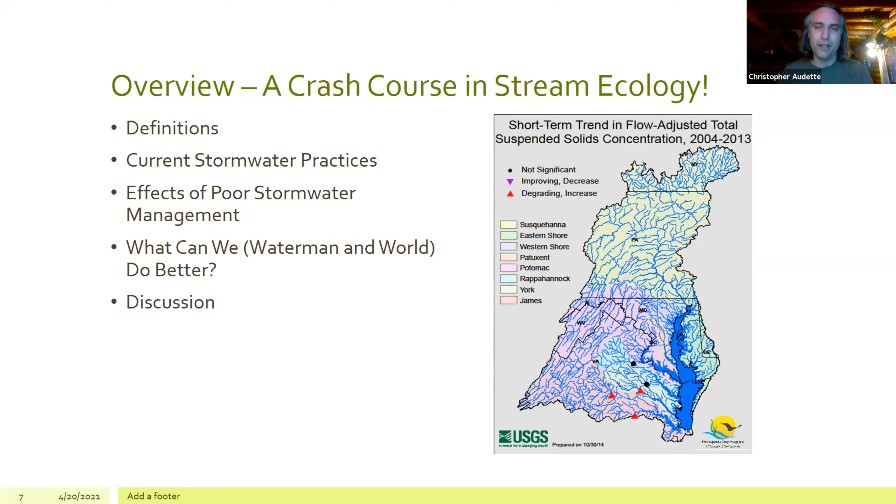All right. Let's mull through some definitions to make sure we're all on the same page. So what is stormwater? Basically just water running or pooled from a storm event.

Impounded means water that's held somewhere or dammed. Infiltration is just how water enters the ground. Erosion is the process where soil is removed by flowing water, for our purposes. Yes, there are other types of erosion.

I'll talk about particulate, generally small solid fragments. They may be dissolved, they might be suspended in the water. They could be made of minerals or they could be made of organic matter. And from there, we break it down into particulate organic matter and dissolved organic matter and some other categories as well.

Sedimentation is the process where particulate settles and it might cover habitat, it might fill crevices. It's basically just the deposition of eroded material. Channelization, typically deepening, usually straightening of a channel or a riverbed.

Nutrient loading and eutrophication is the addition of compounds that promote plant growth, basically fertilization. And eutrophication is the limnology term for how that process happens in nature.

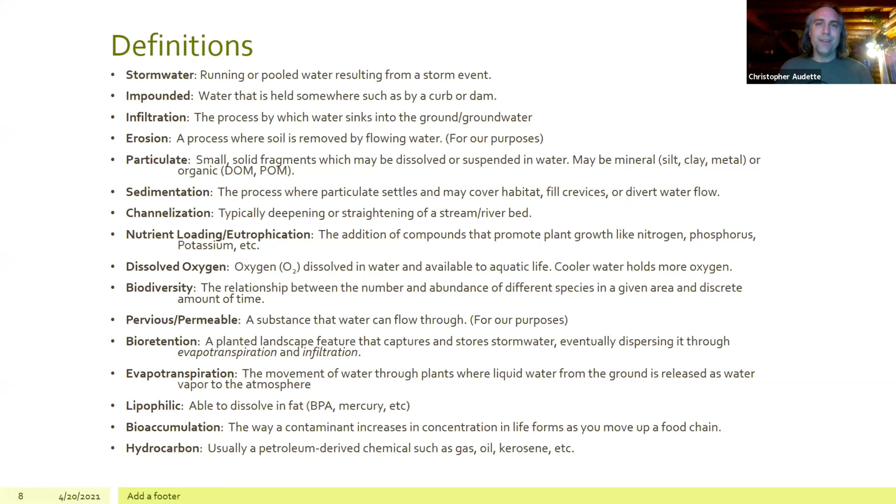As we go through things here, we need to take a break every now and then.

All right, so how is stormwater currently managed? In terms of our houses, we're talking about things like ditches and drains and gutters. We're looking at basically taking water and moving it away from property to avoid damage.

So we have our drippy gutters, we have our overwhelmed ditches, and eventually we want to get it out of here. So it's going into a municipal ditch, it's going into a storm sewer, maybe it's going to a combined sewer. But basically we're handing off that problem.

And it might be a little bit of water, it might be a lot of water, it might be a little bit of sediment, it might be a lot. It depends on where it's coming from and the practices on that particular property.

Similar themes in terms of the current paradigm municipally, though we are moving in better directions in terms of implementing more realistic infrastructure, more robust infrastructure, and green infrastructure.

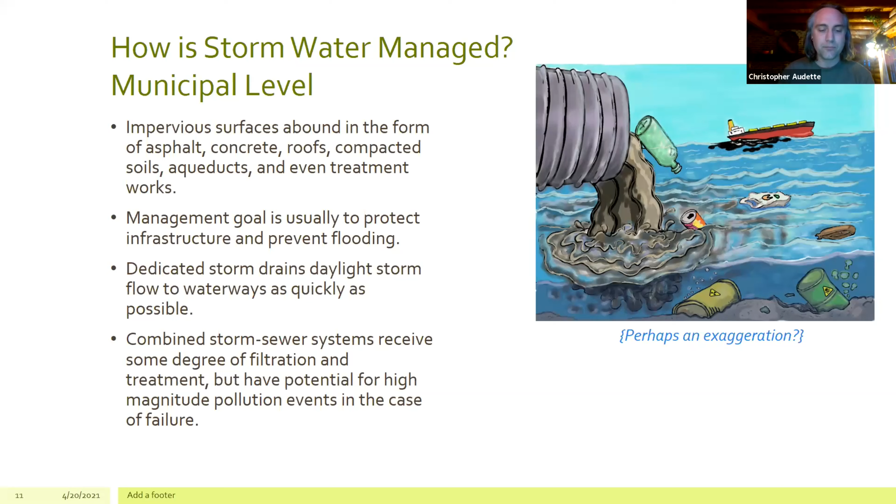But impervious surfaces abound. We have lots of asphalt. We have lots of roofs. We have lots of aging ditches.

Essentially ways just to move water and daylight it and get it to a waterway as fast as possible so that we're preserving life, we're preserving property, but we're also ending up with very fast moving water that has lots of stuff in it. And those are the two biggest problems. I also want to talk about turf.

You know, it isn't really what we think about when we're talking about impervious surfaces, but if you're looking at a wide swath of monocultural grass that has a lot of thatch under it, it's shedding more water than it's absorbing. That being said, there are ways to apply turf in sustainable ways.

What are the effects of poor stormwater management? So in general, poor stormwater management results in poor infiltration, which creates a rapid surface flow that results in a negative impact. All of the negative effects I'm going to talk about feed into one another and self-perpetuate, creating ecological problems and infrastructure problems too, and flooding and that kind of thing.

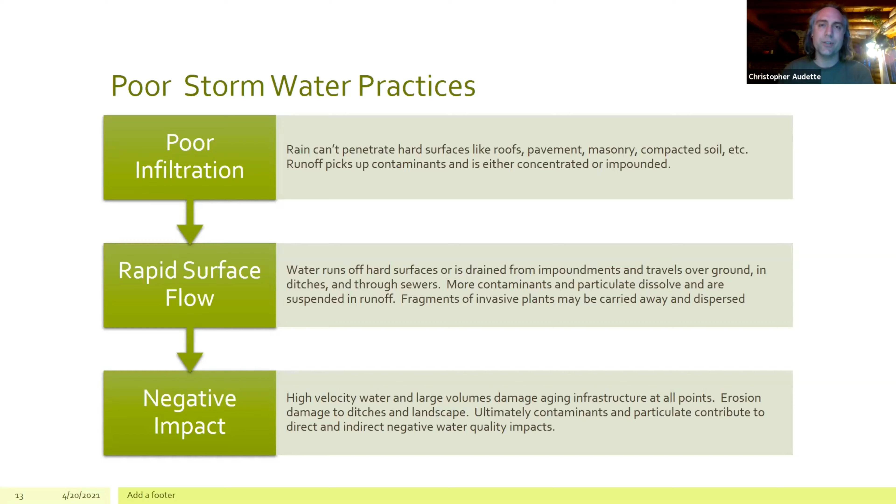So first I'm going to talk about salination and contaminants. We know that runoff from roadways and parking lots often has lots of bad stuff in it: road salt, hydrocarbons, metals, toxic compounds, pesticides, all of that. Residential and agriculture areas can have all of that, and also more fertilizer, more pesticide.

In the case of storm sewers and treatment works, even after treatment, antibiotics enter our waterways at documented levels. We've demonstrated that even at headwater streams in the Adirondacks, we can culture antibiotic-resistant bacteria. Now, the importation and accumulation of these compounds affects the number of species that can survive, either by killing them directly, degrading the habitat, or having their own demand for oxygen. And of course, in the case of things like metals and lipophilic toxins, there's definitely implications for bioaccumulation.

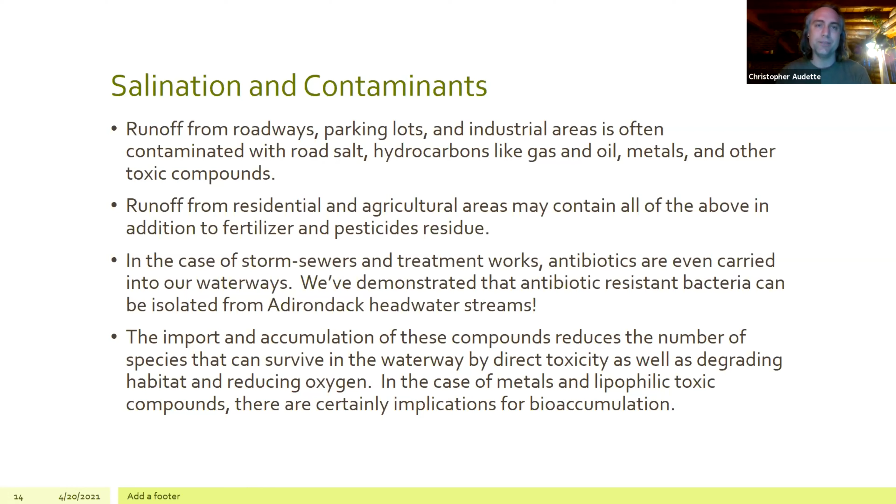You know, these are real world problems, and they stretch beyond just that's a polluted stream, or shucks, it's unfortunate that it flooded so much. There are long-term impacts that we see right in our backyard.

Another issue: while channelization isn't necessarily a result of poor stormwater management, it's integral to it. It initially was an effort towards stormwater management, usually looking to avoid flooding, but still more or less exporting a problem downstream. The unintended consequences of channelization are less diversity of habitat, generally an increase in temperature, scouring of the bottom, and it can make the effects of other processes even worse.

So we have the channelized state on the left versus a natural meandering stream that cycles through different flow patterns on the right.

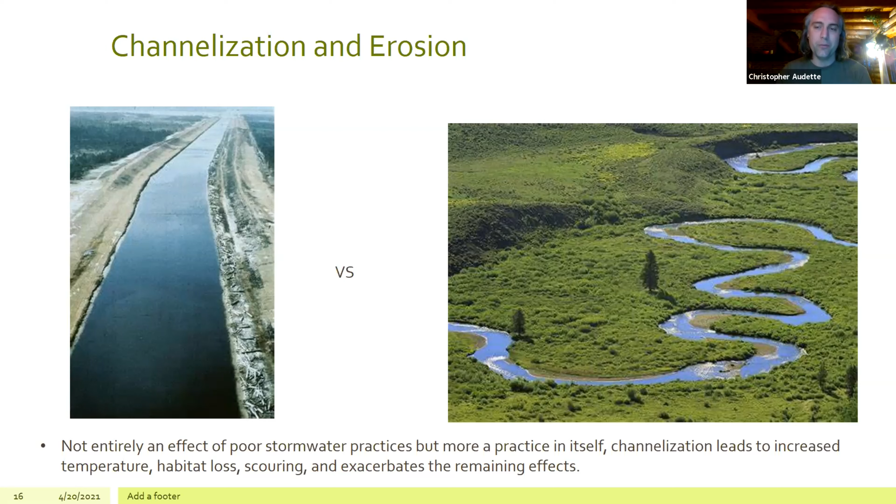The same process that created the Grand Canyon is scouring sand and silt and soil away from our watershed and transporting it to our rivers and waterways. Obviously, if it's powerful enough to dig out a canyon, it's powerful enough to have a substantial impact on our infrastructure.

So erosion directly contributes to sedimentation and nutrient loading in streams. Stormwater entering a waterway might be turbid, which is discolored with particulates. And these particulates may or may not carry fertilizer. They certainly have a fraction of organic matter and other things that decompose and take up oxygen, or they promote things like algae blooms, which we'll talk about their issues in a minute.

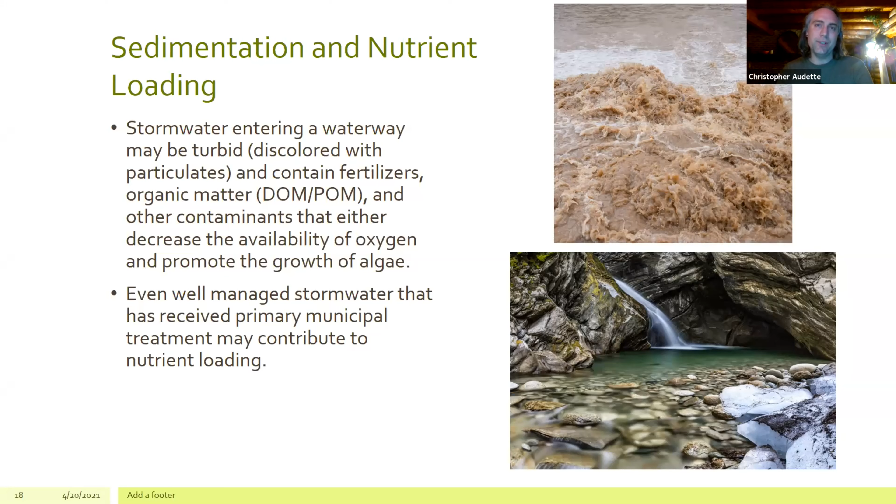And I wanted to note that even well-managed stormwater that's received primary treatment municipally can still contribute to nutrient loading. Even if we take the particulate out, even if we give it some kind of treatment, you can never take out all of the nitrogen and phosphorus.

So what this causes is in aquatic systems, naturally, over quite a lot of time, they go through a process called eutrophication. The systems tend to become more productive, but over a very long time. Stormwater pollution is a key factor in accelerating eutrophication.

This results in a boost in biomass from algae blooms, from the growth of something called periphyton, which is like algae that grows on the surface, and other aquatic vegetation. But this boom in growth isn't sustainable. It's not sustainable by the system. Eventually, it eats up all the nutrients and it dies back.

After it dies back, it decomposes. The process of decomposition, as I said, robs the system of oxygen, and we see a decrease in biodiversity, and it contributes to fish kills like I show in the pictures.

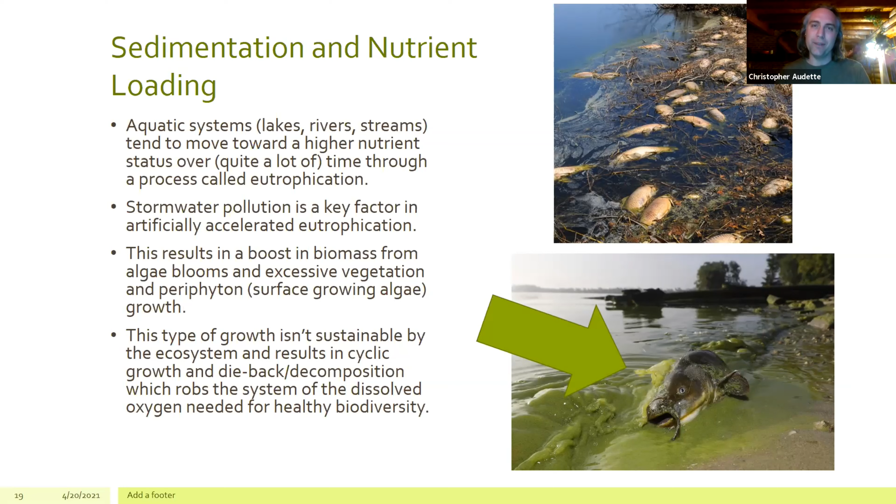And here, if you start seeing catfish and bullhead dying from anoxia, you've got a problem. They practically can crawl up on the bank and breathe themselves.

So algae blooms aren't the end of it in terms of sedimentation. There's also the issue of just the sheer material entering the stream bed. It can alter the topography of the stream bottom. It decreases the diversity. It homogenizes the bottom of the stream, which isn't compatible for diverse life.

In essence, this is habitat loss. We lose opportunity for fish breeding, either through inappropriate bottom and breeding habitat, or through silt being deposited on fish eggs after they're laid, essentially smothering them. It decreases dissolved oxygen, and as stream channels fill in, it's the opposite of channelization. There's implications for flooding, scouring of inappropriate areas, and then further erosion, and it becomes a cycle.

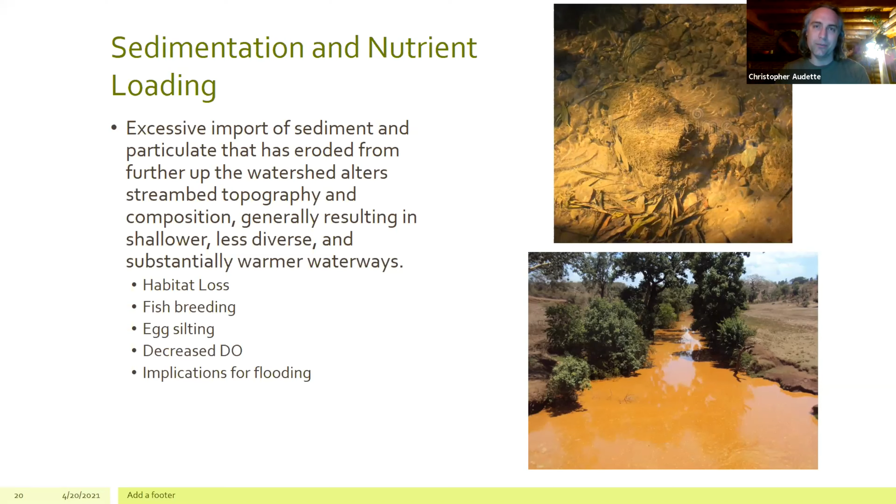Also, the darker the bottom and the shallower the stream, the warmer it is. That's one of the things that's led to the collapse of a lot of our cold water fisheries in Adirondack headwater streams, and that's why we're not seeing these heritage strains of brook trout anymore.

So this is a very scientific graph that I took data from Audette et al. yesterday morning. But I'm just trying to demonstrate, as storm flow enters the stream over the course of a few days, the water comes in at a high rate and that tapers off. What this does...

Is we also see, as the water is entering, we see an increase in dissolved and particulate organic matter. We can use this as an indicator of other contaminants entering as well. And then predictably, over time, as that material decomposes and starts demanding oxygen, we see dissolved oxygen fall off over time.

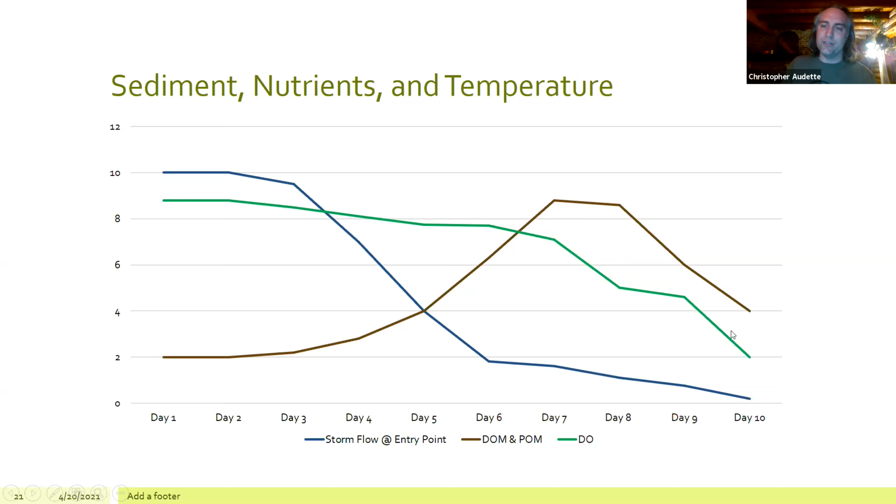So the cascade of all of these effects flow into one another, and I refer to it as a vicious cycle of stormwater pollution. The water immediately becomes contaminated or saltier. We also see the influx of nutrients and particulate organic matter causing algae blooms and sedimentation. We see lower oxygen, higher temperature. This results in fewer organisms and lower biodiversity, and then we cycle through it again. With lower biodiversity and less diverse habitat, the system's already more vulnerable to the next wave.

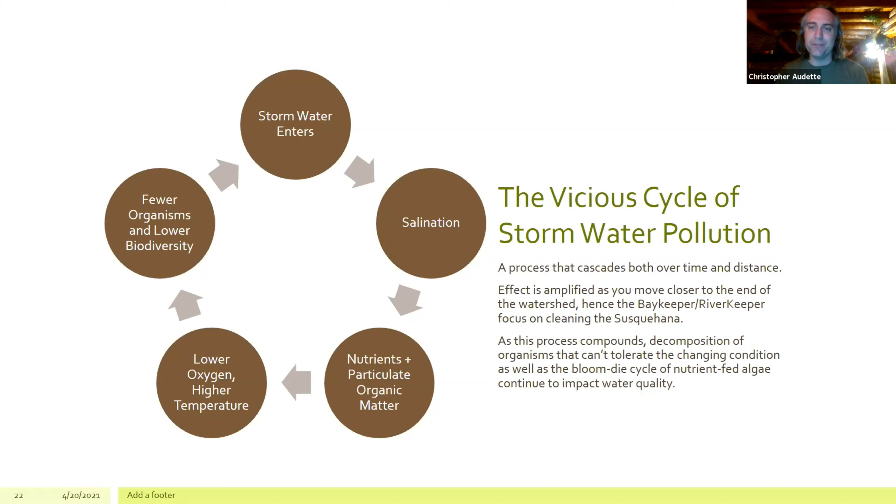So what can we do better? We know that there are distinct benefits to exporting water from our houses. Water in the basement and soggy infrastructure is never a good thing. We know that water needs to be taken away from places where people live in municipalities to protect business and life. But we also know that doing it as quickly and as ruthlessly as we can, and dumping it right into rivers, also has consequences.

So let's talk about sustainable stormwater management and Waterman's Green Innovation Grant Project.

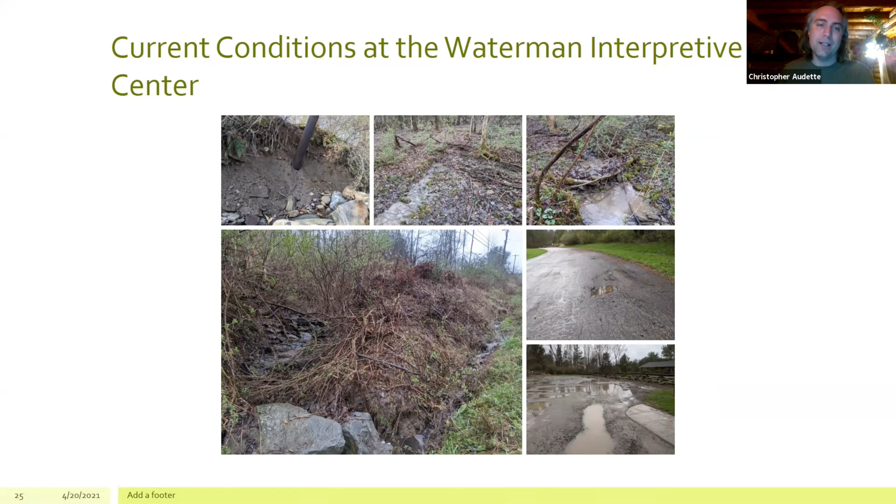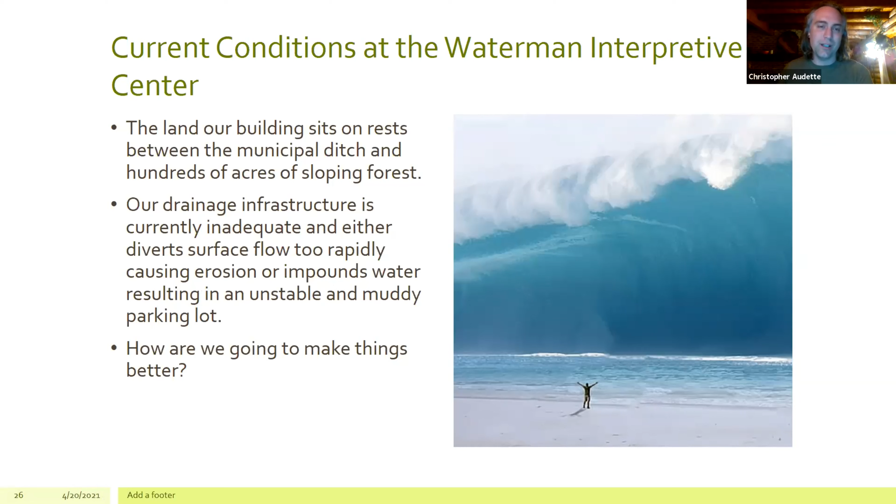So it's not a perfect system. It's certainly not the worst system, but it can be improved upon. Our land sits, at least where the building is, between hundreds of acres of forest on a slope coming towards us and the ditch. We're basically the last stand. And our infrastructure isn't really adequate. It's designed to handle the 4 acres that the building stands on. It's not really designed to address all of this water coming off the slope.

So how are we going to make it better? We have obtained a grant through the New York State Environmental Facilities Corporation through a program called the Green Innovation Grant Program. The money comes from the New York State Clean Water Revolving Fund, and we've also secured funding from additional local foundations.

So we're going to overhaul our drainage system and incorporate several green practices that work with nature rather than against it, that utilize natural processes to encourage water to go into the ground, to move through soil vertically rather than over its surface, which inherently provides better infiltration, or better filtration, and recharges groundwater, and doesn't contribute as much to the rise of rivers and flood events.

We're going to employ a demonstration park sort of format, and it's going to feature 4 different types of pervious pavement in a new parking lot, so people can see how each of those types of pavement holds up over time, and how it functions and how it looks aesthetically. And we'll also speak to the cost of installation for all of that.

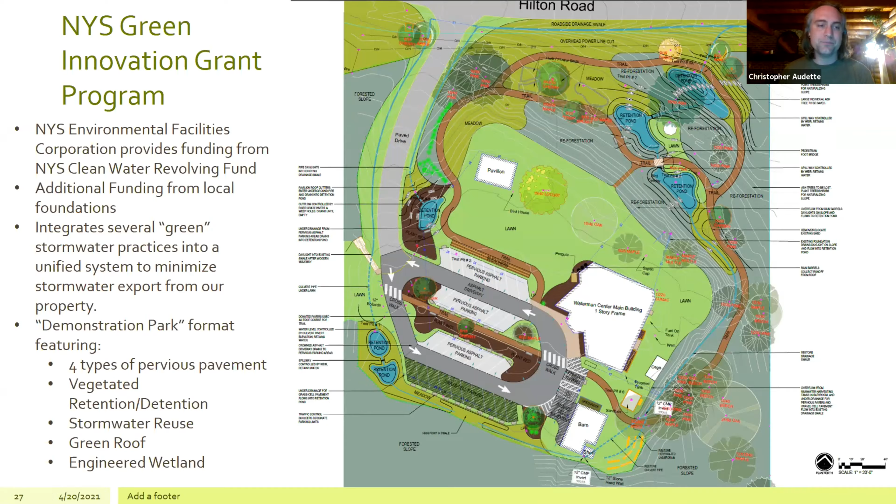We're going to install a green roof. So instead of shooting water off of shingles through a gutter system and into a drain, we're going to install a roof on a demonstration pavilion that absorbs water and has plants to utilize it. Everything will flow down into an engineered wetland out by Hilton Road that will sequester water during those really protracted and severe rainstorms, with the ultimate goal of not exporting water from our property into that overutilized and degrading town infrastructure. So there are various types of pervious pavement.

That ranges from asphalt and concrete products to PVC cells that stabilize gravel or stabilize turf. There's also more traditional patio paver sorts of products that are also pervious.

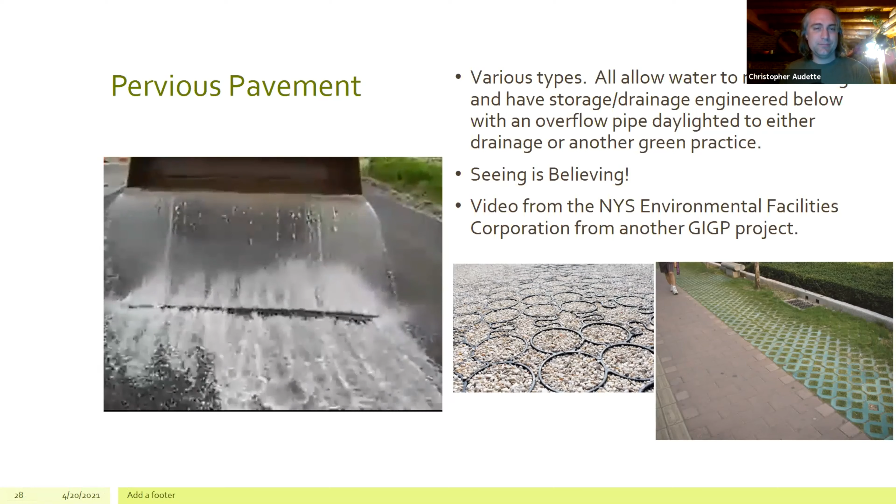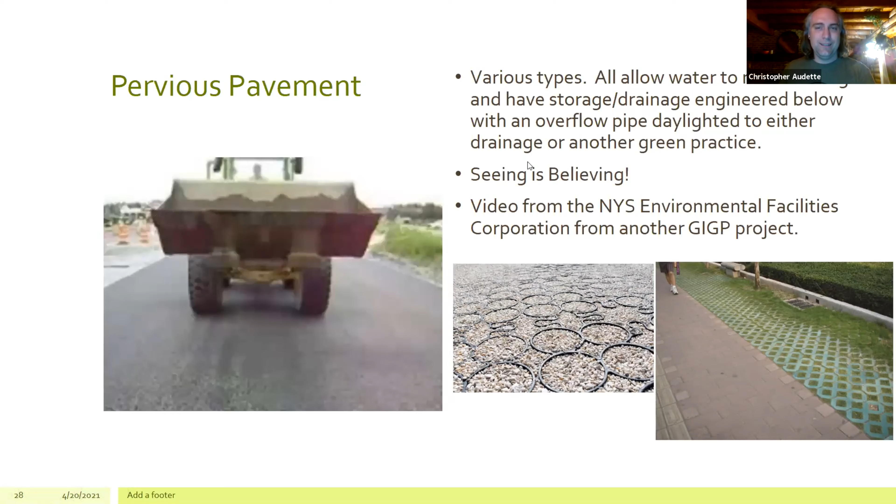I wanted to show you this video from the EFC of a front end loader unloading gallons and gallons of water onto pervious pavement, and you can watch it just disappear. I apologize for the camera work at the end, but it reflects—and exactly, all gone. It's quite remarkable. Underneath pervious pavement is usually several feet of crushed stone and a basin to collect that water and keep it there until it has a chance to infiltrate into the ground. There'll usually be an overflow as well in case that basin fills up, but it really takes a strong rain for that to happen.

Another option, if you're forced to go with a shallow basin, is to have that overflow pipe go into bioretention or biodetention, which is kind of like a small wetland. You use very coarse planting medium to promote infiltration, but then plant roots hold the soil, and the process of evapotranspiration pulls the water up into the atmosphere. So it's either going back into the air or into the ground and not into the river.

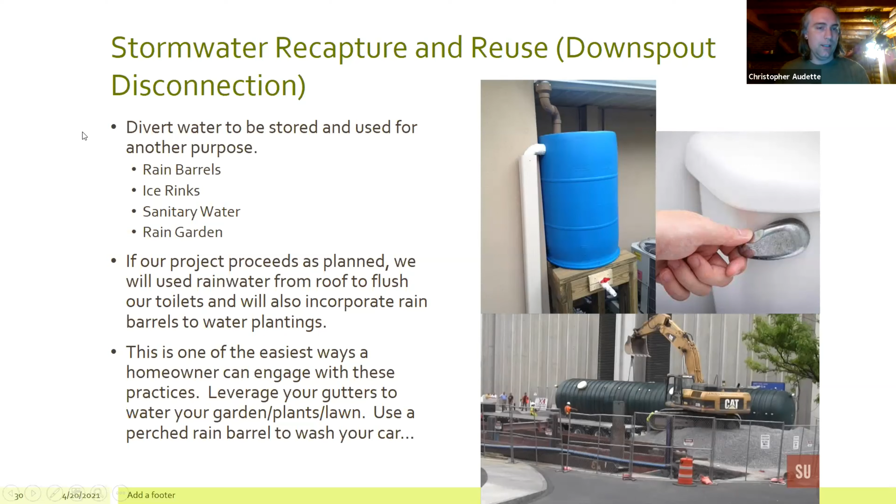Green roofs, I think, are probably one of the most self-explanatory technologies we're implementing. But I wanted to emphasize that it's beyond that neglected corner of your roof where the maple overhangs and it's growing four inches of moss—it's a very specifically engineered layer that is separated from the roof by durable waterproof material.

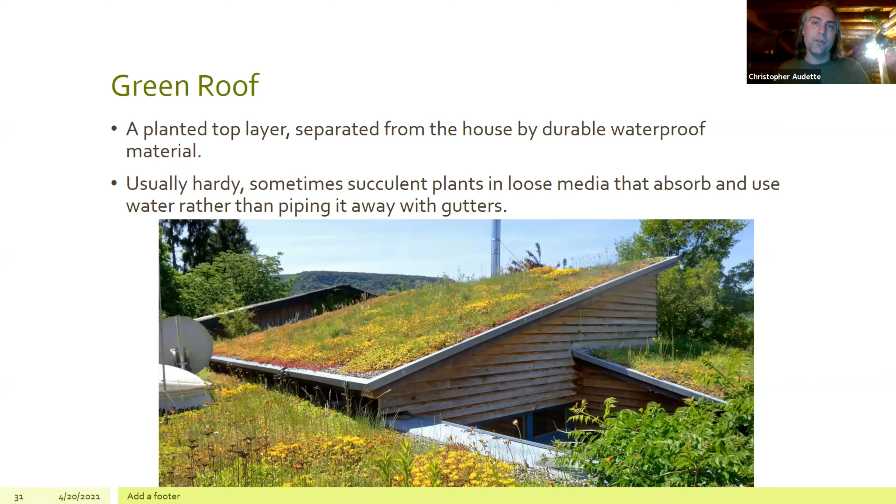Sedum is a favorite plant used in green roofs, and it's a very fast draining media. Usually they're designed to hold a certain amount of water before they start draining, and oftentimes they can absorb an impressive number of gallons and utilize it for growth before it has to drain down a pipe or a gutter.

But in nature, we know wetlands function like a reservoir or a sponge. They absorb and store water during times of abundance and then release it gradually. Natural wetlands also catch sediment.

While they may not use nutrients rapidly, they will sequester them for some time and filter out contaminants. The same applies to our engineered stormwater wetland. It'll function similar to the bioretention pools I mentioned, but it'll be that terminal sequestration stage—our last ditch before it goes down the actual ditch.

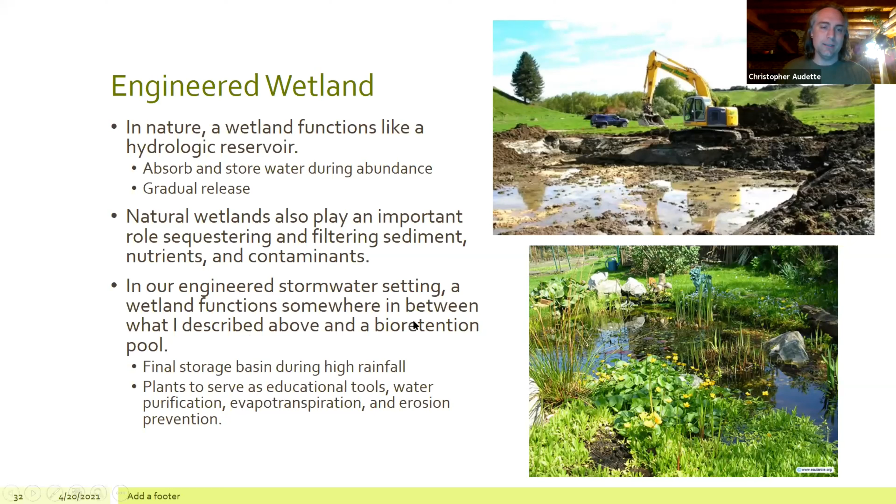And of course, we'll have a diversity of plants that will serve as educational tools. They'll help purify water. We'll have the benefit of evapotranspiration and erosion prevention.

All right, let's discuss. So how can we benefit from this technology? How can we make sure that it's implemented? Because if Waterman, Binghamton City Hall, and a handful of other organizations do these projects and tout how fancy they are, really what's the impact on the Chesapeake Bay watershed? What we need is solid adoption, maybe not of all of these techniques, but at least of some of them.

How do we incentivize these practices? How do we make them more accessible? GIGP and other revolving fund programs are available to organizations and municipalities, but what about homeowners and businesses? What grassroots steps can we promote to our neighbors? How do we say you put in a rain barrel? How do you get your neighbor to do it? And what can you do right now besides install a rain barrel?

You could install five rain barrels. You could plant a rain garden in that spot in your yard where water runs over it, where you can never mow, or you can disconnect a downspout and direct it to that garden. It's going to be less water that runs off your property. And similarly, you can create a bioretention gully or ditch between your property and where it exits.